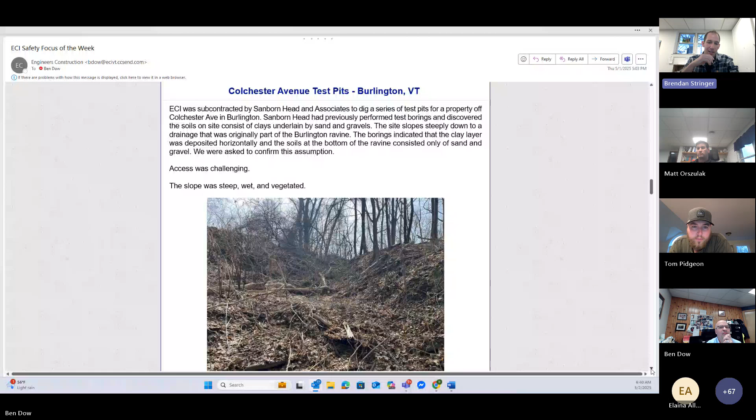We were contracted by Sanborn Head to perform some test pit work on a project where they had previously completed test borings. The test borings indicated there was a layer of clay overlaying underlying sands and gravels. For this project, which was supporting a future development, they got some resistance from a nearby landowner who hired a different geotechnical engineer. That engineer said the soils at the toe of slope were clays, so our goal was to confirm that the soils at the toe of slope were not clays, and were in fact sand and gravels.

So you can see from this first picture, the access comes down through that ravine channel. And if Dow goes to the next picture, you'll notice it's pretty steep through there.

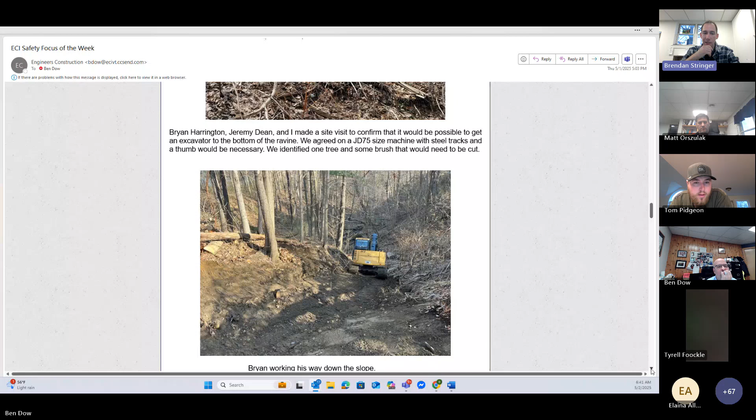So I visited the site with Bryan and Jeremy, and we talked about the best way to get access down through there. Bryan was confident it wouldn't be a problem as long as we cut a couple trees, cleared out some brush, and reshaped the top of the knob at that entry to the drainage. He did a great job smoothing a little road in, bailing everything in front of him so he could get down the slope.

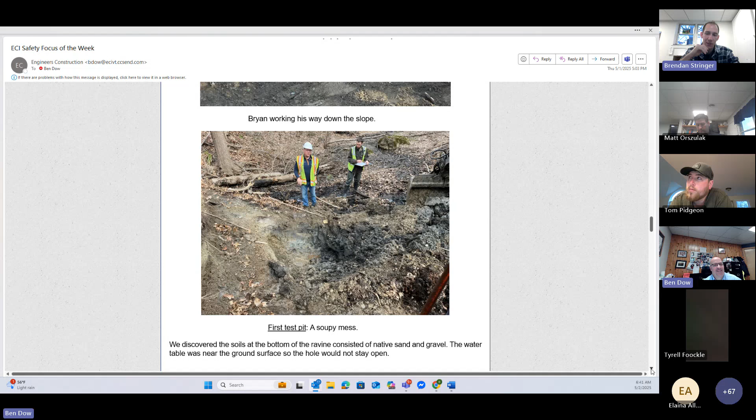So then we got to the bottom and dug our first test pit. In the picture is Sean from Sanborn Head and Alan from Geodesign, the two competing geotechnical engineers we were caught between. The soils consisted primarily of sands and gravels, supporting Sean's assumptions and the data they collected in the borings. Unfortunately, the groundwater was basically at ground surface down there, so it looked like a muck hole.

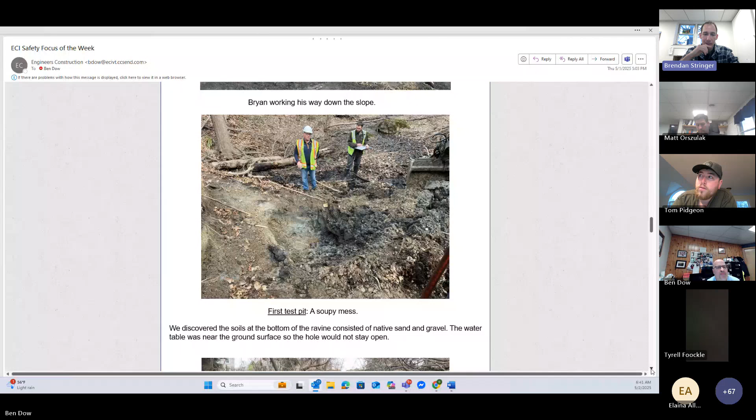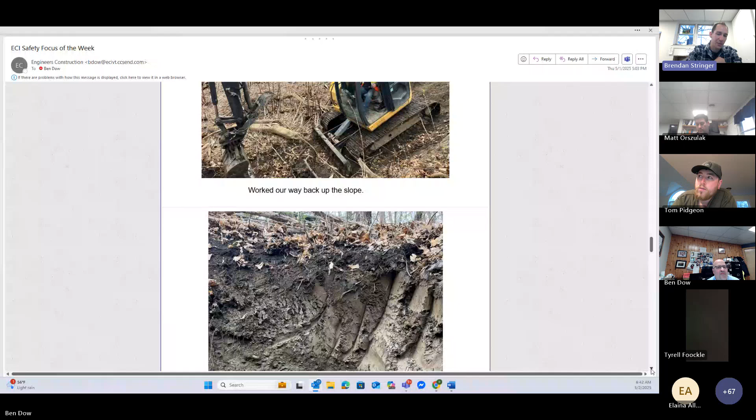We dug 4 feet down and it just kept falling in on us. So we confirmed it was sand and gravel, didn't encounter any clays, and decided to abandon that test pit and work our way up the slope. Bryan was doing a good job of restoring everything as he went. Getting out of the mud was kind of challenging for a second, but we got it. Then we went on to our second test pit.

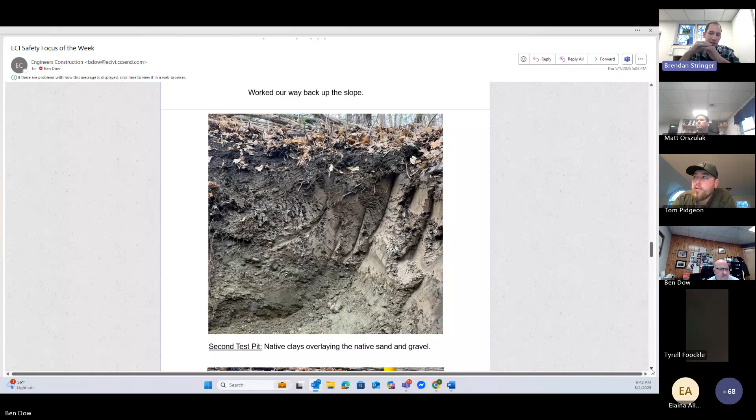This second test pit was really cool, and I like this picture because you can see very clearly the line where the sands and gravels transition to the clay. This confirmed Sean's assumption that the clay layer was deposited horizontally, which generally makes sense in terms of the geology of how that occurs. The sands and gravels were underneath it.

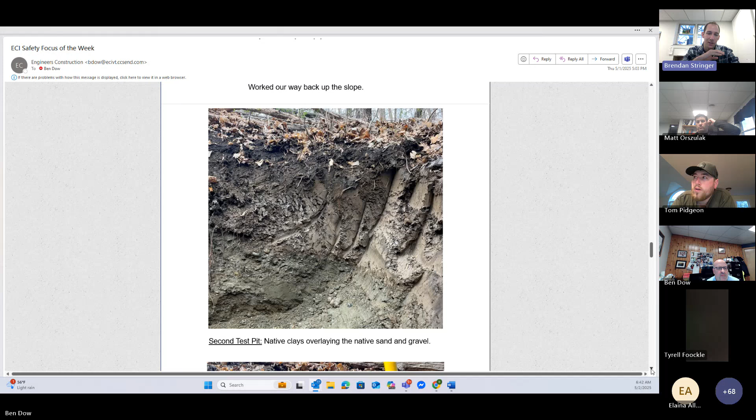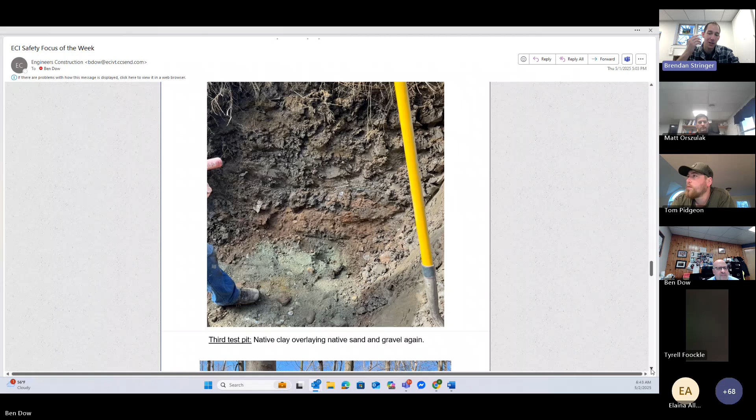As we worked our way up the slope even further, we got to our third test pit. What you're seeing here is just a thicker layer of clay overlying the sands and gravels once again. So we're supporting the idea that as we go up in elevation, the clay layer is getting thicker. But the bottom of the clay layer, that interface between clay and sand and gravel, generally stayed around the same elevation, which supports Sean's theory and what the borings indicated of a horizontal clay deposition.

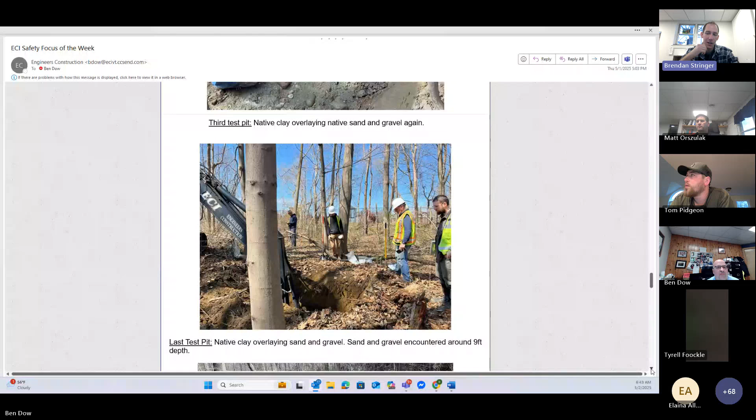So then we got to the top of slope. Finally, we did our last test pit and dug down through about 9 foot of clay, and we just scratched the top of that sand and gravel layer. The 75 we used was pretty well at the max it could reach, and the sand and gravel was quite dense down that deep. So we were just able to scratch it and confirm that it was, once again, a significant clay layer overlying the existing sands and gravels.

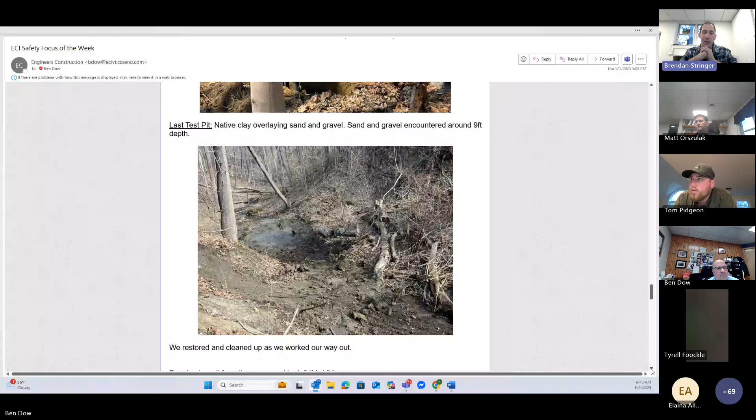This is a picture partway down the slope of what it looked like after we restored it. Bryan did a great job smoothing everything out and making the slope look nice and buttoned up.

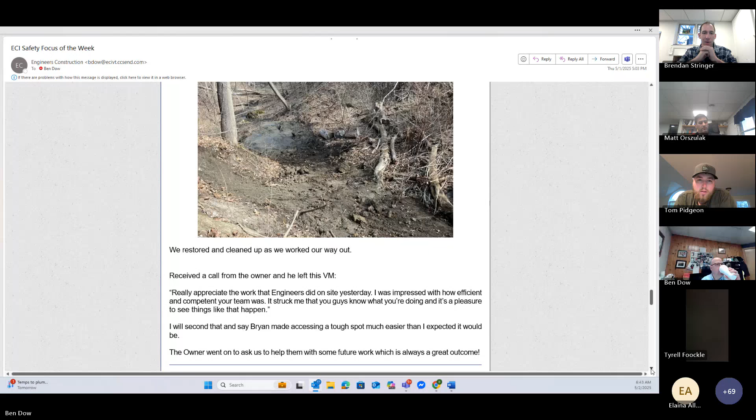For me, this project is a perfect example of how our test pit work should go. I love it when the engineers come out with an assumption of how things are going to go, or some existing data on site, and then we're able to confirm it. In this case, we confirmed Sean's assumptions of horizontal soil layers, which was exactly the intent. It's not always that we get test pits that so clearly match up and align with our goals, so that was nice. It makes this a really good example of what test pits can be - it's not just digging holes. We went out there with a very clear hypothesis and we either confirmed or denied it. In this case, we confirmed it.

So the following day, I received a voicemail from the owner who was on site for most of the work. I'll just read the quote here: he said he really appreciated the work Engineers did on site yesterday. 'I was impressed by how efficient and competent your team was. It struck me that you guys know what you're doing, and it's a pleasure to see things like that happen.' And I just wanted to put my own complimentary tidbit in here for Bryan - he made it a lot easier than I thought it would be, and as you guys know, he's a good operator. So that's not surprising. Thank you, Brendan.

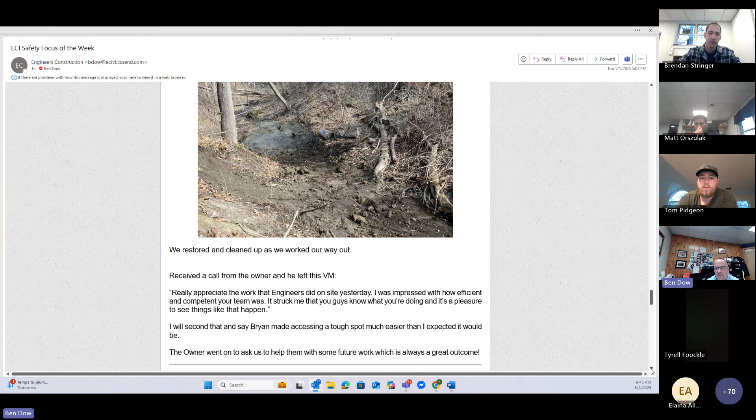Good engineering always comes from good information for a design, and in what we do, subsurface investigation is very, very important. A lot of times when people skimp on that or don't do a good job, we all pay for it when we're trying to build the job. We've supported a lot of engineering efforts over the years for local engineers to do test pits. Before we go back to Dave, I'll say that test pits are very important to finding underground utilities, including gas lines. So there's a lot of reasons to dig test pits besides doing the subsurface investigation for the engineering.

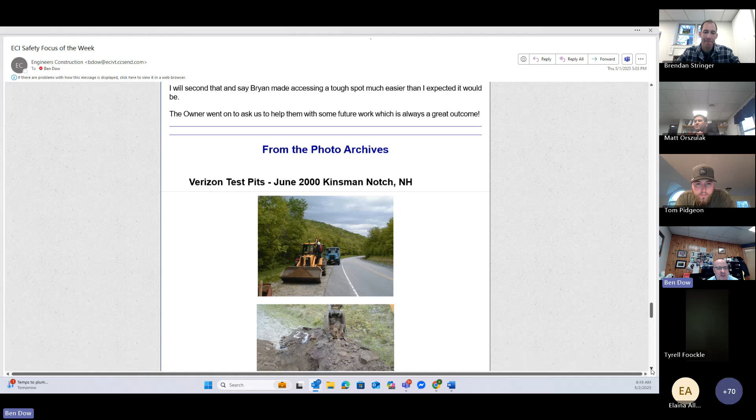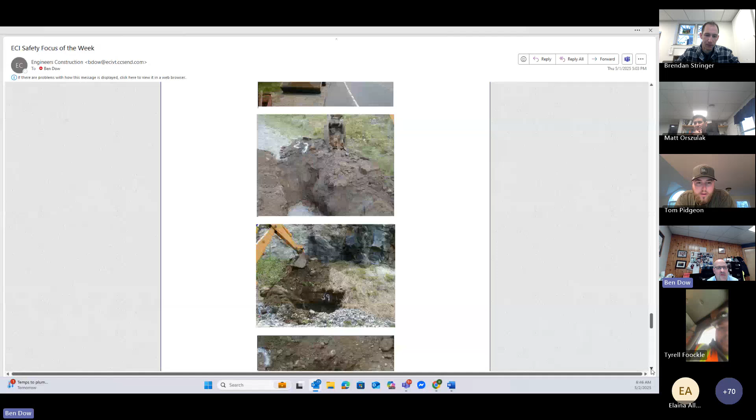A good example of one job we did, almost 200 test pits, is back here from the archives. In 2000, we went to Kinsman Notch, New Hampshire, and you can see the holes are numbered. Mike Twombly actually worked on this job with us doing survey work when he worked for Krebs. These are just a few photos from 2000, some of the different test pits that we did. There's Delwyn Gilly, probably one of the better, more experienced operators that we ever had here, and myself up at the Notch.

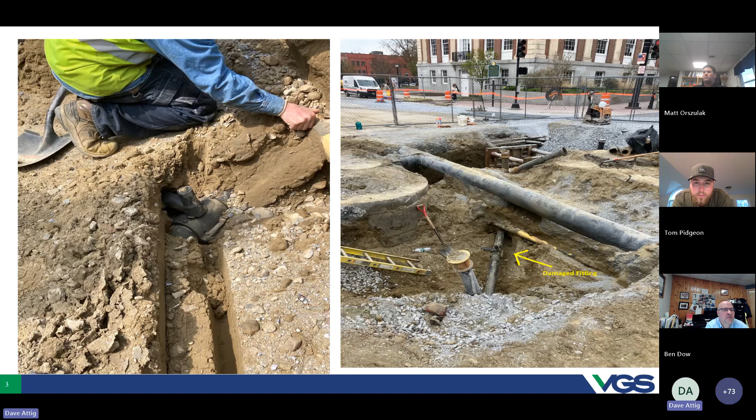So the restaurants got shut down. I mean, it was a real thing. So, you know, this is the kind of stuff that we see from time to time.

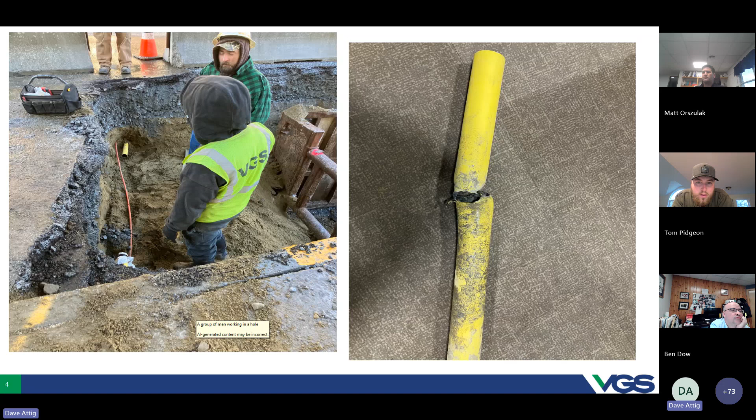Here's another one. The point to really focus in on all these is like the bottom left corner of the left-hand picture, right up on the asphalt, a yellow mark, right? And right below that is the gas line. So this was a case of that one extra scoop — they thought they knew how deep it was, and they took that one extra scoop instead of the hand shovel, and they hit it.

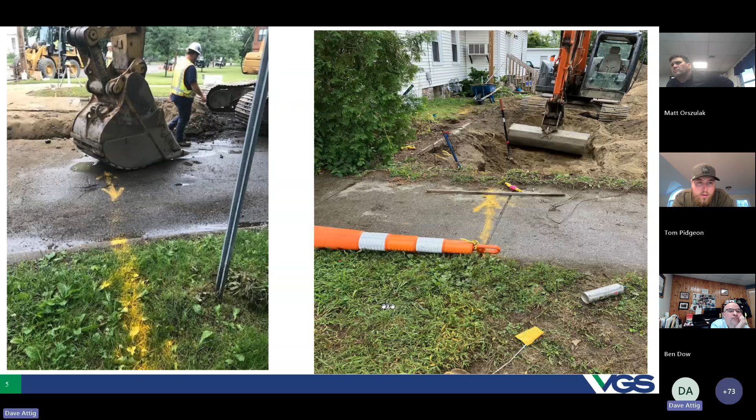Another one out — you can see all the marks very well marked out, and again, they clipped it with an excavator. And then one last one, this is stuff we see quite often.

We're not perfect. We do have cases where our folks do mismark stuff. We had one locator, retired years ago, who used to always like to say, 'I mark the wire, I don't mark the pipe.' As you guys probably all know, locating wire for the plastic pipe, we're locating the wire, we're not locating the plastic pipe. So if the wire, for some reason, as part of excavation activity or something, gets pulled off or just moved, it can mark it off a little bit. So that's kind of the reason for that whole 18-inch tolerance zone on either side that we're all supposed to be working with.

And then the other thing that becomes problematic once in a while — I know you guys have your own locators, so some of your folks probably run into this as well — is signal jump. You're looking from the street straight up to the meter at the house, you're looking at maps, you're like okay, here we go. And then as you're marking it out, unbeknownst to you, somebody laid a dog fence or cable TV or Burlington Telecom or something, and it jumps onto that, and you end up close to the same place, but not exactly, and that just happens to be the spot that gets hit.

So, I mean, we own that it happens, but the vast majority of the damages are that one extra scoop — not potholing to verify the depth is a big one. And then accidents. We had one the other day where the excavator did everything right, according to what he said, but he was moving the trench box, and the trench box slipped and came down and hit the service line and broke it. So those types of things, you know, you have the rock that rolls out of the side of the wall.

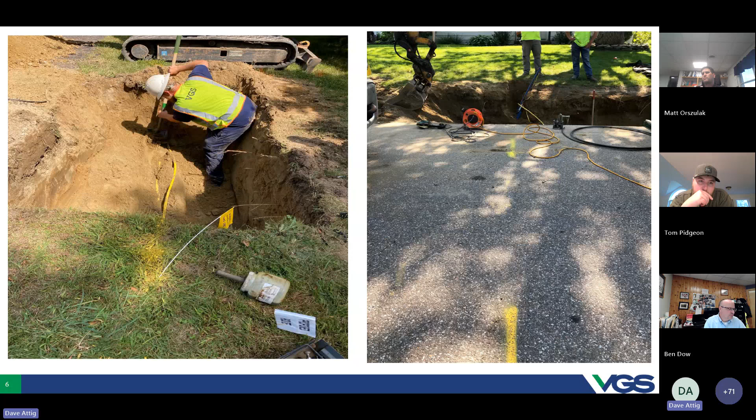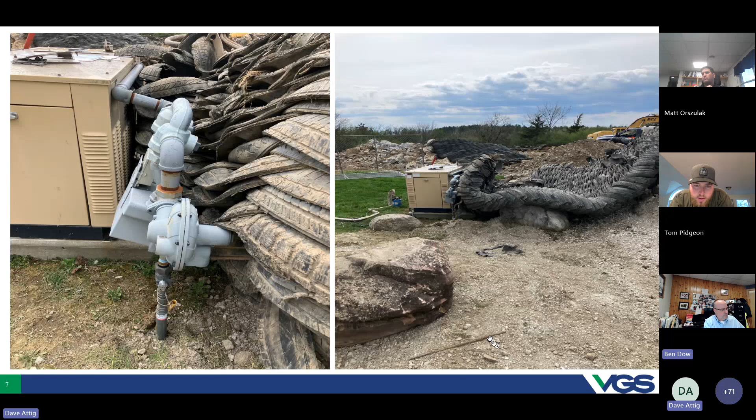Those are all types of things that you got to be aware of. I think you had an accident, if you want to call it, the other day. Now this isn't really DigSafe related, but it was one of those things that happens. So anyhow, that's the show and tell picture piece.

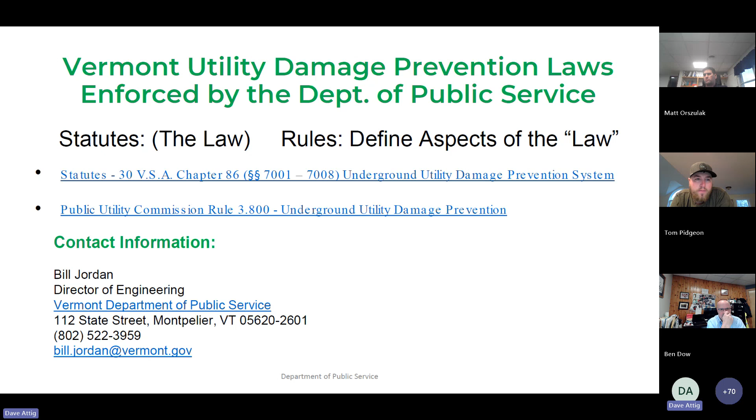They haven't updated it, so some things are still a little out of date. You all know that when they changed the law last year, they tried to change it from 48 hours to 72. The 72 got changed for the call-before-you-dig piece, but not the locators-have-to-mark piece. Now, from what I understand, it's in a transportation bill that just got passed by the Senate a day ago. It still has to go back to the House. So hopefully within a month or two it'll all be straight across the board: locators have to mark in 72 hours, excavators have to call 72 hours. But for right now, it's call before you dig, and you have to call 72 hours.

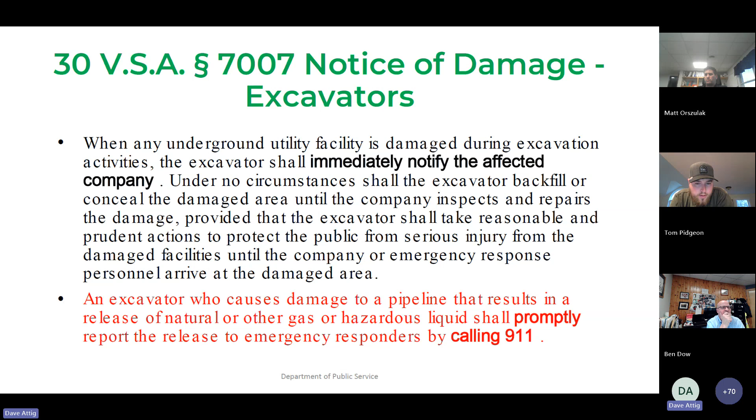Just want to remind everybody that this is a state law and also a federal law, extremely important: if you damage any pipeline that has a flammable or hazardous liquid—this isn't just natural gas, it could be propane, gasoline, whatever—the first call you have to make is 911. Not Matt Orszulak down at Vermont Gas. Call him next, or actually call the Vermont Gas emergency number next. But make sure you call 911 first, get the fire department out there.

They're supposedly changing it to make it more user friendly for reporting, not just damages, but also if the locator didn't show up or the locator's marks are wrong. From what I understand, it's still in the works, but it hasn't happened yet.

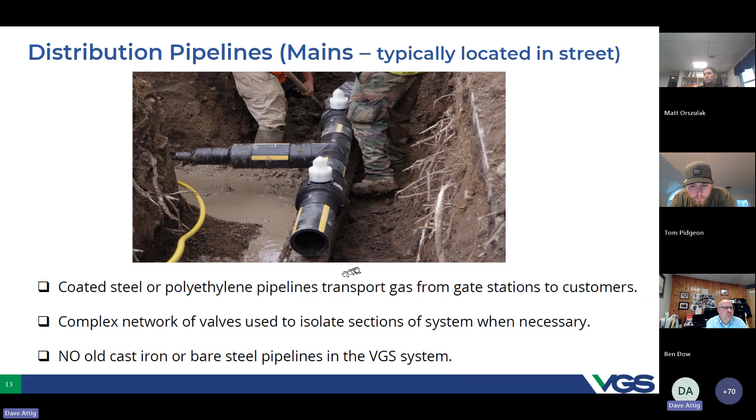Behaviors of gas: it's odorless, we give it that rotten eggy smell. It's lighter than air, so the nice thing is that if you do hit a line, it goes up and away. But it does follow the path of least resistance. So if you ever break a line underground and it can't go freely straight up, it's going to go sideways. If you pulled a pipe and think, maybe we didn't break it—maybe you broke it underneath the ground and you don't know about it. It's extremely important that you still call us and get us out there quick, because it could be migrating underground and getting up into somebody's foundation.

Those are the classic examples where somebody—Mrs. Smith—comes home at the end of the day, turns the light switch on in her house, and the house blows up unbeknownst to her because the gas filled her house up. So especially in asphalt situations or frost situations where the gas can't freely go up, it will migrate sideways.

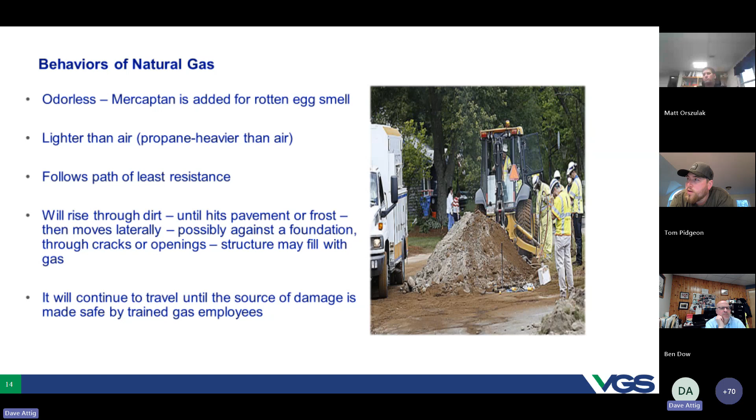Ignition sources - pretty much anything - smoking, backhoe, static electricity. Don't jump in a hole. We've had people hit a service line with an excess flow valve on it, and it's not leaking much, so they'll jump in there, feats of strength.

They'll kink it over and wrap some duct tape around it. Big no-no. When gas is leaking, it'll build a static charge up, and you touching it - just like touching your light switch or your TV in the wintertime - can create a spark, and you can have an ignition. So you just let it go. Call us, call the fire department.

I always get the question, what do I do with the excavating equipment? If I hit the gas line, do I turn it on? Do I shut it off? Do I move it? I always toss back: your call.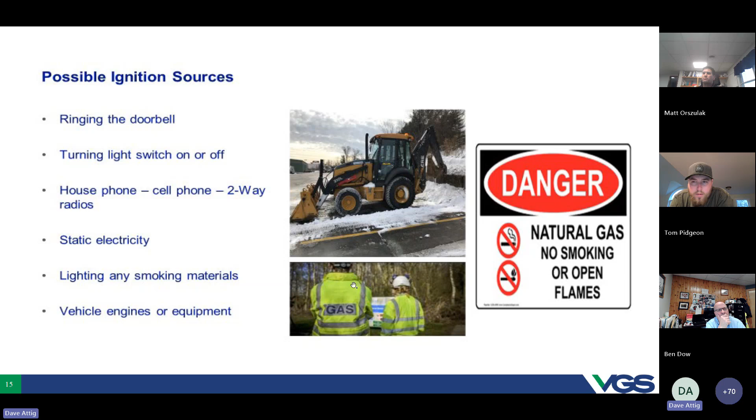So the bottom line, the way I leave it with the excavators is: if you're on a piece of excavating equipment, you hit a line and it's a screamer - oh shit - just get off the machine, just run, call 911, secure the area. Under the dig safe law in Vermont, you're required to protect the area until the fire department gets there. So evacuate the area, block the street if it's a street or sidewalk to make sure nobody walks through the area. If you see gas, even though it's colorless, you'll be able to see it, just distorted.

If it's blowing into Mrs. Smith's house in the summertime and it's safe to do so, go knock on Mrs. Smith's door. Don't ring a doorbell and say, 'Look, Mrs. Smith, you need to get the hell out of here quick,' and shut the door so the gas doesn't go into the house, and just secure the area.

Now, that said, if you hit the 3/4-inch service line and the excess flow valve kicks in and the laborer sits there and says, 'I think we hit a line, I think it might be gas, I think I might smell it' - in those cases, back the piece of machine away, shut it down. Same thing: secure the area, call the fire department and us, but it's a different situation, not quite as bad. So yeah, we talked about this.

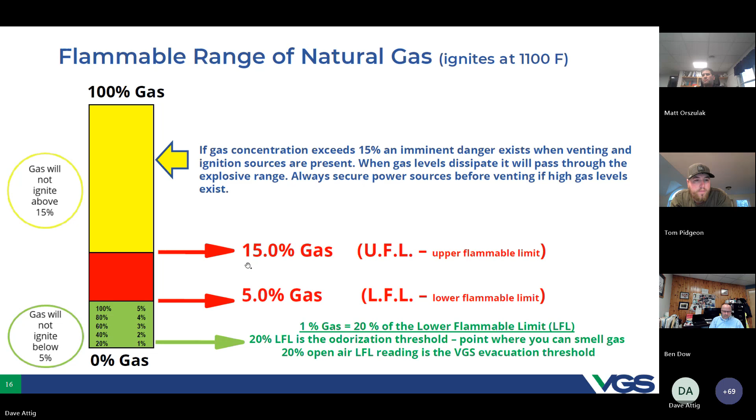Don't forget - and I'm sure you're aware of this, you run into it all the time - in Vermont, the law is utilities have to mark what they own. So we own up to the meter, so we're going to mark up to the meter. But in a lot of cases, unbeknownst to us, somebody may hire a plumbing and heating contractor, and on the other side of the house they tap into their inside gas piping and run it out through the basement wall to run to a pool heater, or a gas grill, or a street light, and we don't know about that. So if you're digging in that backyard, you could potentially hit that line.

So again, I think you guys have your own locating equipment that you go out and try to locate the privately owned stuff, so you don't hit that as well. But there is stuff out there that we don't own that is buried. And obviously, other utilities - electric doesn't always mark up to the house. A lot of times they just mark to the pedestal or to the service drop, so then you have to worry about getting the rest of it marked up to the structure itself.

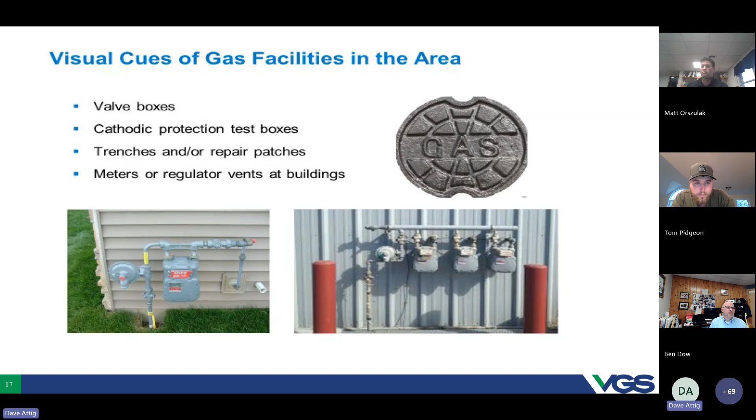Propane as well, don't forget propane. The nice thing about propane is if you can find the tank, if something happens, you still need to call 911 and the propane company, but get to that tank valve and shut it off, so at least you have a little more capability of shutting it off in those situations.

Almost finishing up here. Just remember, look at what you're doing. It's extremely important for the person who's doing the excavating to have a copy of the ticket. I can't tell you how many times we've had damages where the office person calls the ticket in and they may not have exactly on that ticket what the work is supposed to be.

A good example, a very simple one - this was years ago, but Burlington called in a ticket for storm drain repair in front of 1 Maple Street. All right, storm drain repair right in front of 1 Maple Street. Well, we got out there, we marked it, and then we get a call that they hit a gas line. We get there, and well, it was storm drains, plural, in front of 1 Maple Street and on the other side of 1 Maple Street. So the way it was written, it read that it was just that one storm drain in front of 1 Maple Street, and really it was the storm drains on Maple Street in front of 1 Maple Street.

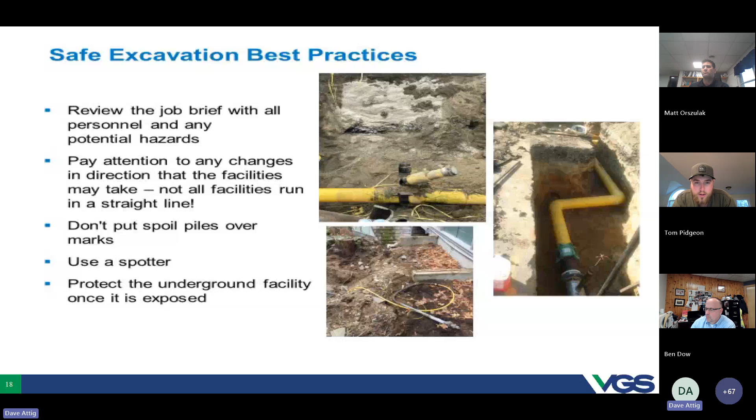So make sure that's where the person in the field, if they have that ticket, can look at it and think, wait a minute, this says I'm going from X to Y and I'm going to Z - so you can call DigSafe or the utility and get somebody out there to tweak it and amend it.

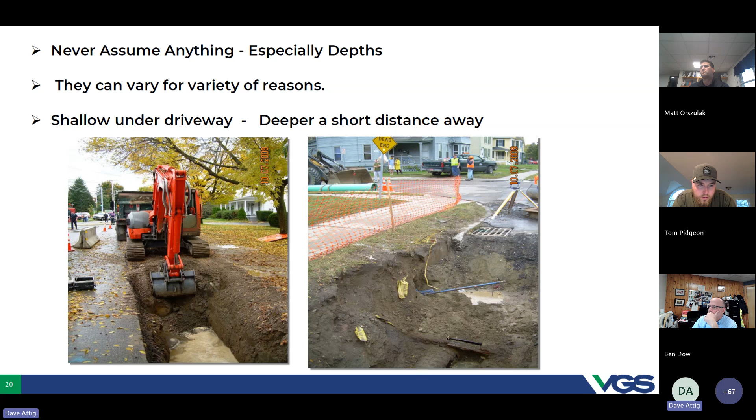Again, things don't run in a straight line. Never assume the depths. Depths vary. We talked about private meters and stuff.

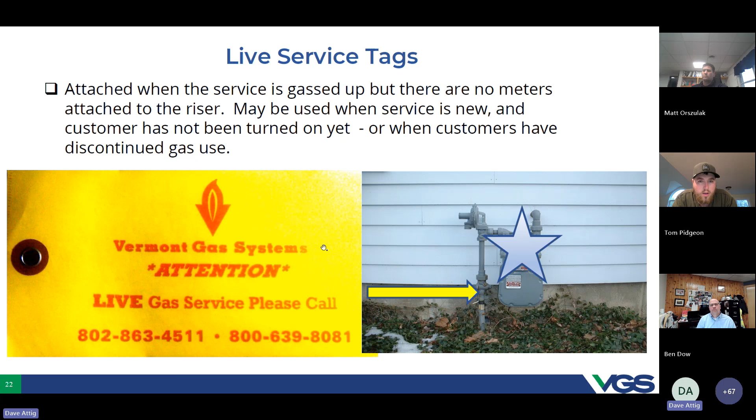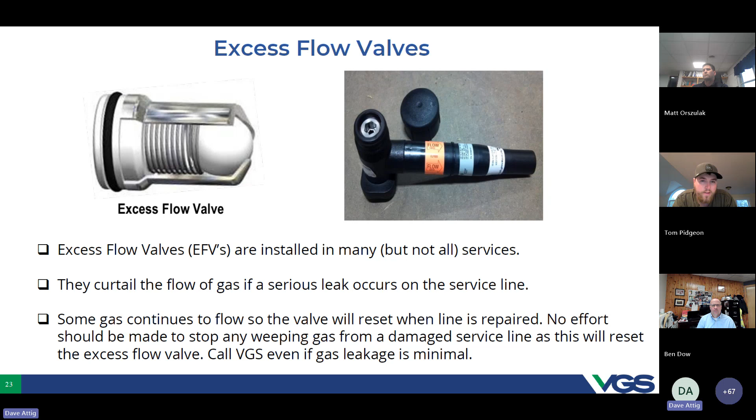And then the excess flow valves - I've already mentioned these a bunch of times - but we've been installing them in services for years now. They're not in all of our services, but they do make a huge difference. If ECI calls us up and says, hey, we just hit a gas line out here at 1 Maple Street, and we immediately look up in our records and see, oh, that's a plastic service, everyone just takes a deep breath, because we know it's going to be a gas leak. We'll have to fix it, but it's not going to be a screamer because it has an excess flow valve in it. Those are for the service lines, not obviously the main. If it's out in the main, you still got the issues.

Almost finishing up here - pipeline markers. Just remember, pipeline markers are basically an awareness thing. It doesn't mean you don't have to call DigSafe. It's a thing that says, hey, there is something in the area, you call DigSafe.

Marking tape, for the old timers, that was the gold standard - where you put that bucket in the ground, you go down a foot, you hit the red for buried electric, the yellow for buried gas, and you're like, ooh, there's something here. Well, you only put that in when you do open digging. And as you know just as well as we do, open digging is becoming a rare thing now - everybody does directional boring. And you can't put marking tape in when you're directional boring.

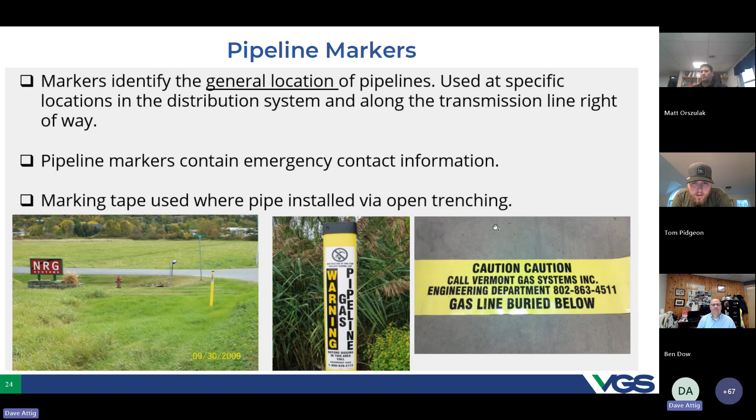If you used to be one of those people that relied on the marking tape, be aware that marking tape is not everywhere all the time. And pipelines can be anywhere. Don't assume just because you're out in the middle of nowhere. Here's a couple pictures of our transmission line.

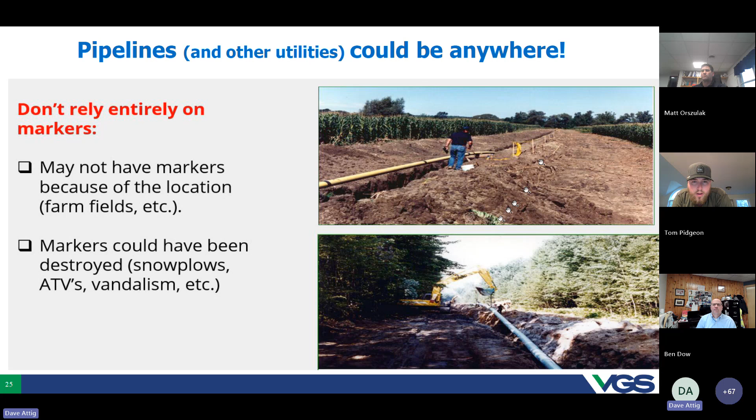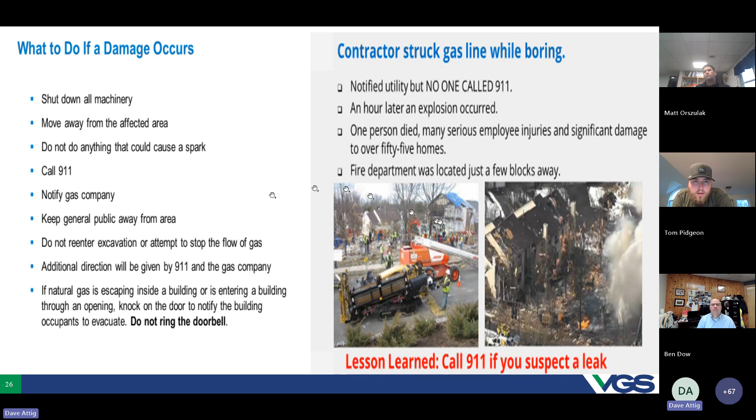I think a good chunk of you folks have been involved with us on either transmission line repairs or some of the installation on newer ones, so we're out in some pretty rural territories. And again, we already kind of touched on this: move away from the affected area, call 911. Don't jump in the trench.

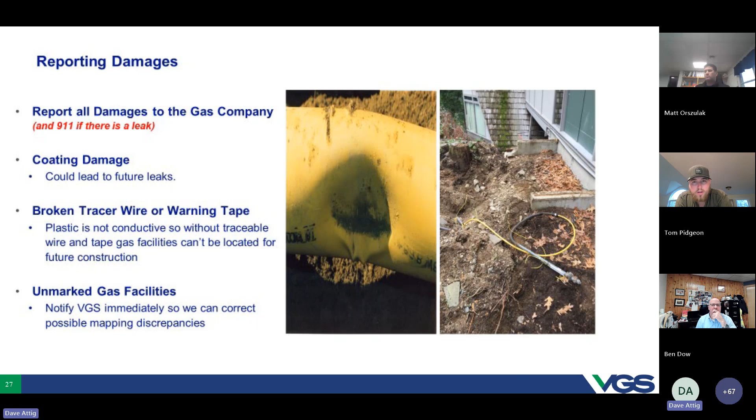And then other damages. If you hit something, if you scrape the coating, if you break the tracer wire, please call us. In most cases, we're not going to bill for something like this. If it was a good faith effort, we really try, but we scraped the side of the coating because we want to fix the coating, we don't want it to corrode later. The tracer wire, we want to make sure it's in a straight row so we can mark it out. And if you see something, we've had contractors call us and say, hey, we didn't do this, but there's a big dent in your pipe, and we can tell that it wasn't them, that it's rusty and corroded, that it was somebody who dug in the area before. So we can fix that.

And then lastly, this is a thing I send out. You probably have a copy of this already. Matt, you can pass it out to all your guys. But that is that.

Any questions, anybody? Stories? Oh, I got plenty of stories, but Dave, thanks for jumping on and showing us best practice. Oh yeah, go ahead. Someone had a question? Yeah. Fire away.

Hi Dave, Walter Lazars, bridge worker here at ECI. How do we check our sense of smell out in the field? How do you check your sense of smell out in the field?

That's a very good question, actually. We have to check the gas in our pipe routinely, and our guys who actually test it, we test them on a routine basis. There's something we send them to the doctors for, it's like 20 different smells that they have to smell, right? COVID has created an issue because a lot of people have lost their sense of smell.